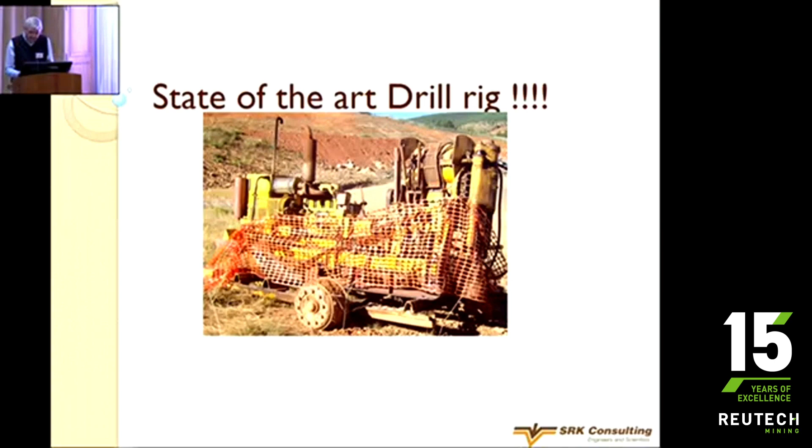Where's my pointer? Where's my pointer, Johan? Is it the button in the middle? Actually, yes, sorry, which one is this? The small one? That one? Yep. Okay, right. Oh, there, I've got it.

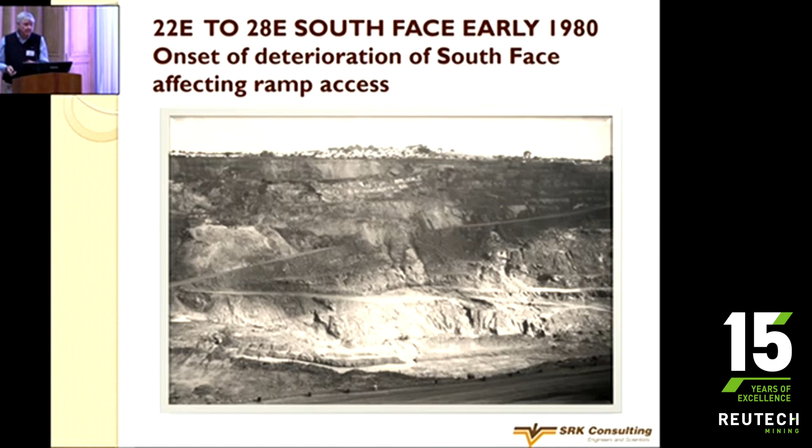You can see the failure starting to develop here - well, not starting, I mean that's developed. This was the main ramp coming down. You can see it deteriorating down here as well. So that was the history of the south wall of Nchanga.

In 2001, just to set the scene, in November 2000, Oscar, Stefan and I were asked to go up to the mine and do a risk review of the open pit. We got up there on the Sunday, and on the Monday morning we had the meeting. The first thing we asked was whether they had an evacuation procedure in place for the mine in case anything happened. Yes, they said they did. We said, can we see it? They sent a young mining engineer off to get it, and we never saw the young mining engineer or the evacuation procedure at all.

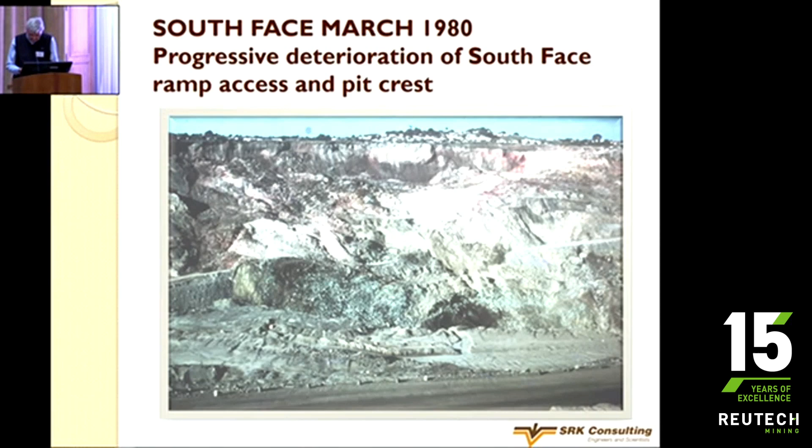In April 2001 - let's go here, sorry - the operation was taking place at the bottom of the pit here, and over here was the crest of the pit at that stage. There was a viewpoint here, and one of the managers had gone down to the viewpoint to keep an eye on what was happening at the bottom. In the corner of the viewpoint, he saw some settlement and a few cracks around the back. It was no big deal because that's what we saw all the time, and we managed it, since there's lots of space in this area. The pit was 265 meters, close to 300 meters deep, and anything that happened here was never going to reach the bottom. Anyway, he reported it to the geotech engineer, who went out to have a look.

Again, he thought no problem here. And then he went out on the Saturday morning to have a look, and there were cracks. The cracks were tens of meters long, with displacement of 300 to 500 millimeters horizontally and vertically. Again, not a problem for us.

We knew it was going to fail, but it was never going to reach the bottom, and it was an issue because there were people working down there. That's where the main mining was taking place.

Anyway, he went out on Sunday morning, and the cracks were hundreds of meters long. You can see from there to there is 400 meters. That's how big the cracking was, and it was bad cracking.

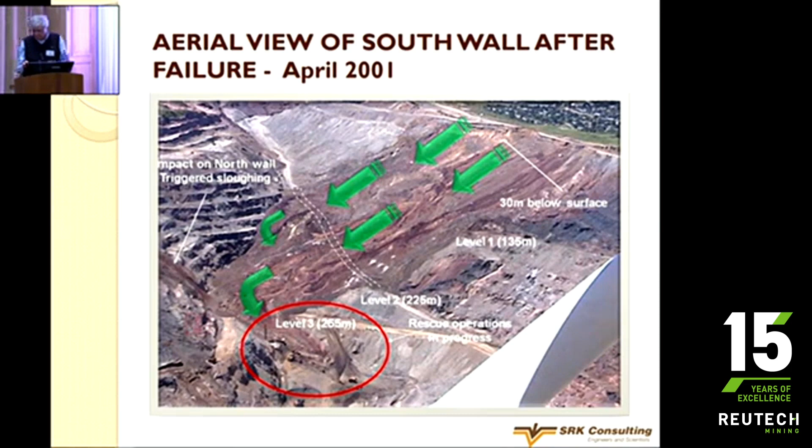I'm not saying that this slope had stood for many years like that. We had small failures on it all the time, nothing quite as severe as this. Anyway, that was the one - there's a P&H shovel sitting there for you, totally destroyed. The claim for this accident, in 2001, was $85 million.

It took 7 years to finalize the claim. The problem was, in the policy drawn up in 1953, around when the mining started here, there were two words used to describe a failure: collapse and failure. The insurance people said whatever word was in the policy - I think it was collapse, not failure - they said collapse is not a failure. And that took 7 years to sort out the difference between collapse and failure.

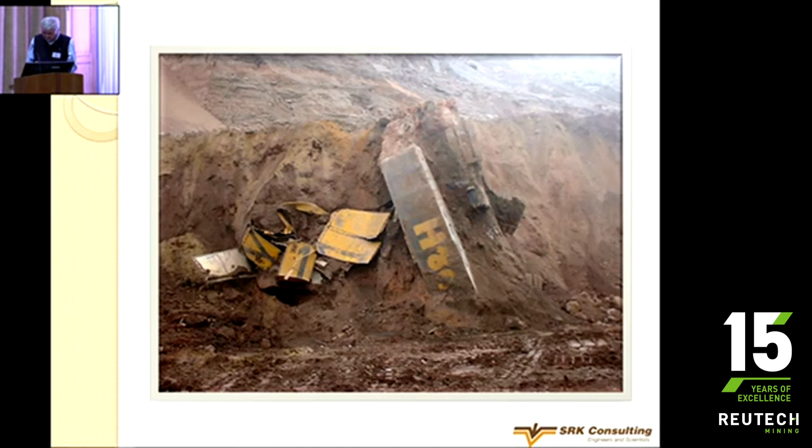Anyway, they were paid out eventually, but it was not a very pleasant thing. Oscar and Bruce Murphy were flying to London almost monthly, certainly for the first 2 years, to meet with the insurers. Again, not very pleasant - you know what lawyers are like, they're not great guys. They're nice guys, but they'll tell you black is white and make you believe it.

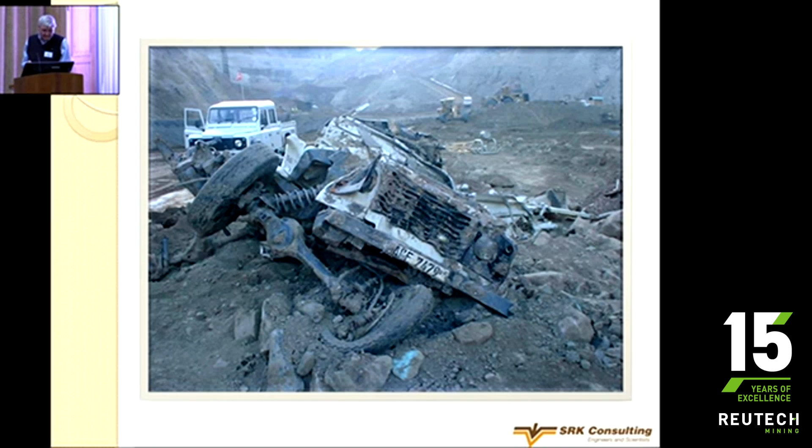A Land Rover, there were people in there. Okay, and that was it. It then took us 6 weeks to get what was left of the last guy out, just as a matter of interest.

Oscar and I had only gone for the week to make sure operations were in place. When we went to say goodbye to the GM, he said, 'Are you both going?' I said, 'Yeah, we both have to go back.' He said, 'No, one of you has to stay.' And when it was me and Oscar, I knew who would be staying - it was Jimmy. I came home 6 weeks later. So I had a very traumatic experience.

We managed to rehab the pit. All that stuff was cleared away. We managed to reestablish the benches, and the mine continued. This is where they were mining originally, and they went back in and completed the cut without further incident.

That was the very sad Nchanga story, and I just thought it was worth sharing it with you, because that's the consequence of mismanaging a slope. The water was a big issue. Every visit we had to the mine, we said, you've got to do something about the water. Nothing ever happened - no piezometers, no nothing.

The pipeline that came from the outlet I showed you, back to the mill on the south face, used to leak like a sieve. When they were pumping, the water just behind where that viewpoint was would shoot 20, 30 meters in the air and then just flood that Dambo area. So there was surface water there all the time.

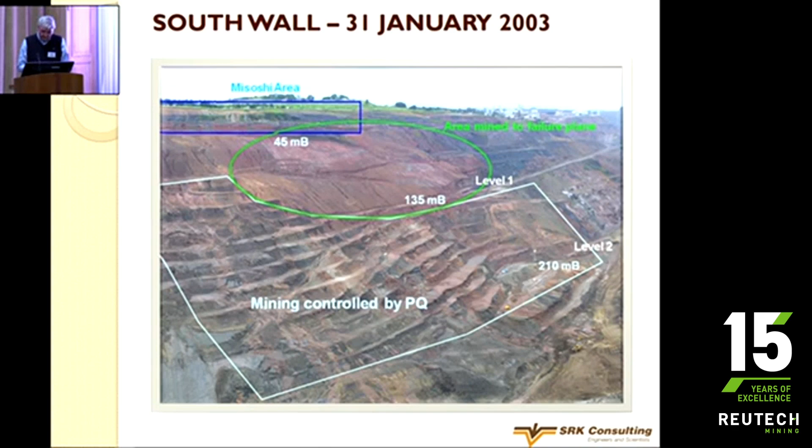Sorry, I'll come back to Cowal shortly.

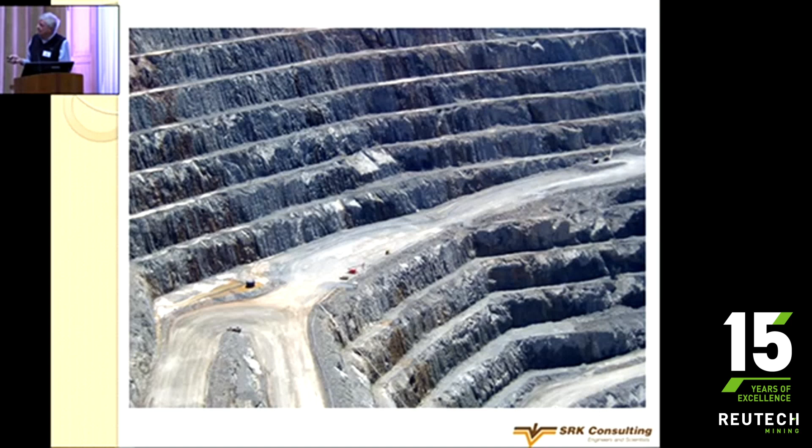Sorry, let me go back there. Oh, this is Cowal as well. The only problems they had were some structural failures. You can see a wedge there, a plane failure, a bit of a wedge, another wedge, and that was all. The crests were a problem to keep in place, but it was no big deal. There was nothing more ever than a bench scale failure. There's some more plane failures, no problem with those.

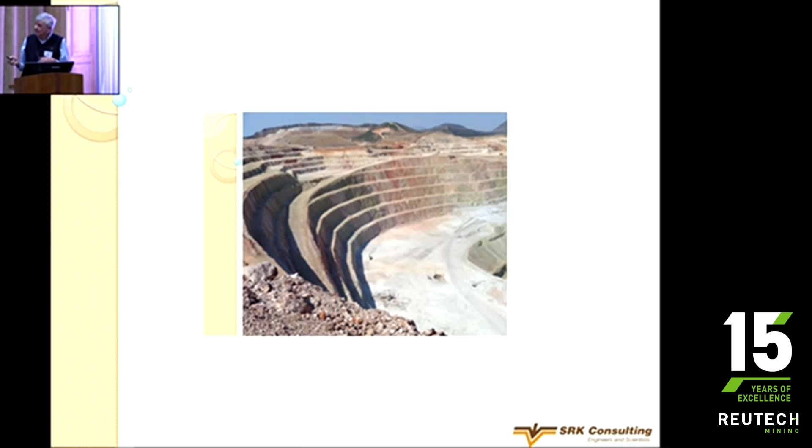This is Kalgold near Mafeking. This is a very steep slope, close to 70 degrees with a very steep foliation. We targeted the foliation on the benches, and we drilled our bench angles off at 70, and we got down to about here with no problem, and then we started to get some failures here.

So we actually started putting anchors in, 20-meter anchors, 10-meter benches. They were 10 meters spaced 10 meters horizontally, and every bench between those two 10s, we put in one in the middle between those two, and we anchored that thing from that sort of mid slope height to the bottom. They're now pumping tailings into the pit from another mine that sits to the north, just on the other side of the main road, and that's being filled up with tailings now.

This is... there's the one in America. No, not Bingham. Is it Gold Strike? Anglo? Mike, do you remember the name of it?

Okay, not serious. This is the infrastructure for an underground mine in the area, and there was a portal underneath here as well. It was a pretty well monitored failure. It was caused by a big structure on this side and another structure on this side. So they knew all about it happening, and everybody was moved out, certainly from the underground mining which was happening below this slope at that time. But to re-establish what was happening at the bottom, and then to come and try and take this out, that became problematic. But they did manage to do it, and I think it still operates today.

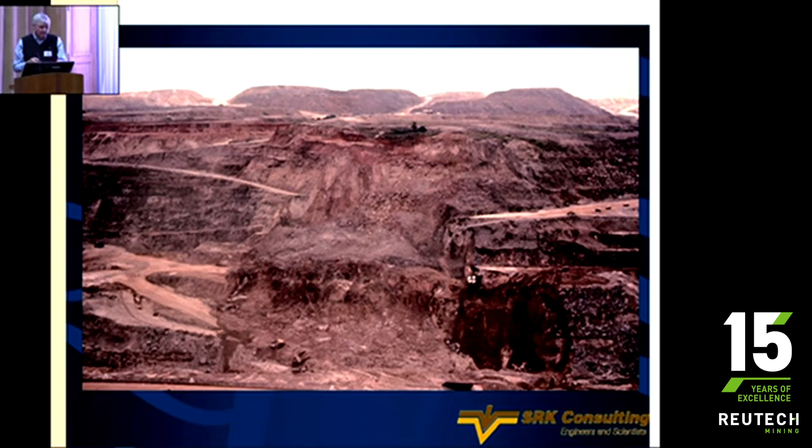Right, that worked. This was Anglo's mine at Sadiola in Mali.

And the problem that we had here was the weathering profile in the saprolite - there was also quite a thick cover of saprolite. Again, it was 32 to 35 degree slope angles. But because the drilling was fairly sparse on that slope, the mine decided to steepen the slope before they got to where the rock mass actually became fairly decent. And you can see it's quite hard rock here.

But above it, the saprolites are bad. And these slopes started to fail, and the main ramp into the pit came down that wall. And of course, it wiped out that ramp, and they had to put another ramp in on this side of the wall, this side of the pit.

And then we lived with the problem of these boulders, because the failure was now undercutting the slope, and this stuff was raveling in. And this is where there was a shear zone, about 40 meters wide, dipping to the west. This was happening above the ore, so it made mining the ore out here very difficult. Anyway, they managed to do it, and they've moved on from there now.

I'm just coming back to Cowal Mine, that lake I told you about, and what they didn't do about trying to cut the water off. This is what happened.

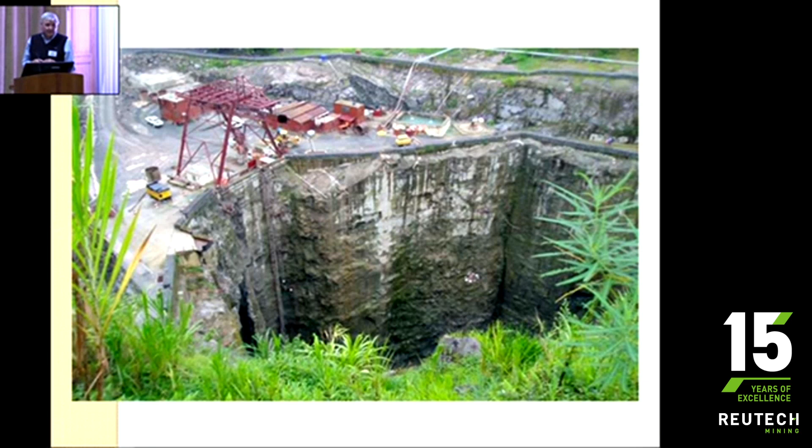This is one of our famous SRK vertical pits. This one is in Sierra Leone at Koidu, a town called Koidu, diamond mine. There was a small quarry here. These are some of the benches of the quarry, but the owners now needed revenue to start their open pit mining. They approached us and asked how they could get the kimberlite out without stripping any waste.

We had done a vertical pit before. The first one we did was at Nyala, a chrome mine in Zimbabwe, which was very successful. We got to about 90 meters, and the bottom of the chrome market fell out, and they just walked away from it. That thing stood there for about another 2 or 3 years with a bit of deterioration. It was being supported, but the hole remained open.

This one we mined down on the contact. So this was the granodiorite contact with the kimberlite, and we came down right on that contact as closely as we could. Support went in all the way down, long anchors at the top, getting shorter and shorter. The walls were shotcreted, because this was going to go to 110 meters.

Again, we got to about 95 meters, and there was a big failure, which I'll show you next. But the walls had to be shotcreted and meshed and shotcreted again, because you can't have anything fist size coming off from up here reporting to the bottom - it's going to do some serious damage if you've got people there, or equipment even. Big issue.

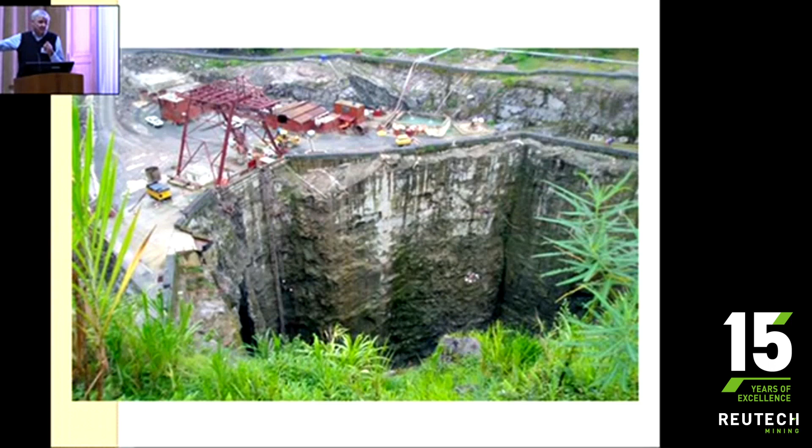I again got a call that night this happened, to get on the plane and come up the next day, which I did. Let me just go back here. They strung a cable, they fixed it. It was in this wall here. They fixed a cable here, swung it and slung it across to this side, and we could get in the kibble. It was one of those air-driven things, so we could go across, sideways and up and down.

In these two planes that you see here, there was no sign of any anchors or any holes even. And when you get a failure like this, which you have supported, you will normally see anchors hanging out. Nothing. In doing the root cause analysis, we think that they put in holes maybe 3 or 4 meters long and stuck a few cables out the collar, and that was it.

Here's a scale for you. Here's a guy standing here, say he's 2 meters. And this was at 95 meters deep now.

This happened, came out with a blast. There's a big blast at the bottom here. Thank heavens there was nobody in the pit, obviously everybody was evacuated. But this was pretty much the end of the vertical pit. They thought they could backfill it and put more support in, but that was going to be too expensive, so they never did that. Anyway, off they went with that.

So if anyone wants a vertical pit, we can help you.

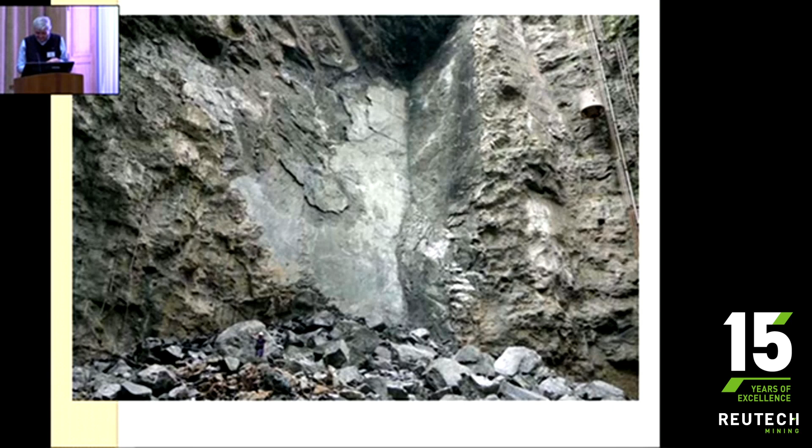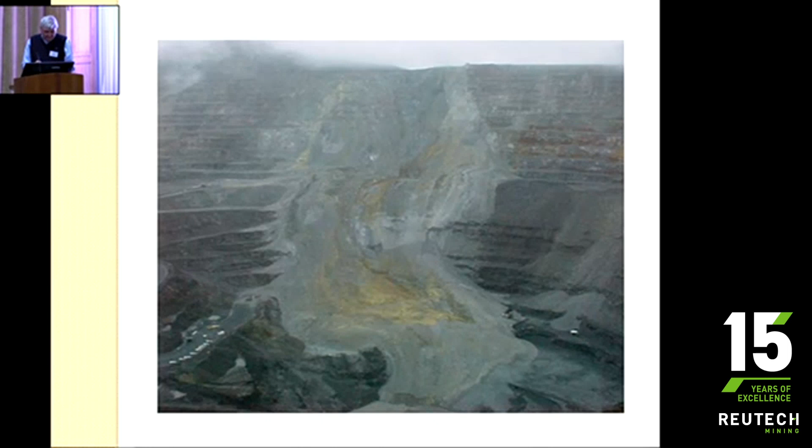This is a pit in Chile, the name slips me again. But this was quite an interesting one because we had been doing some work there, and this was the main ramp into the pit that went right down to the bottom and turned around and came down in the bottom. We'd been worried about this failure happening.

It was a high risk area, and we'd been talking about force majeure to them. Force majeure, those two words were not something that they understood. We said, if something happens to you now, this will close the mine. And in fact, it did. It closed the mine, and that was that.

It reminds me of a job that Oscar and I did in Indonesia, a mine called Batu Hijau. There was an American guy doing the design there, and his philosophy was he would mine a bench - they were 15-meter benches - and if the bench looked okay, he'd pace off 5 meters and then start again.

And that's how that was his design, literally. He only did something when some cracks appeared, then he'd step off 10 meters instead of 5 meters. So we said, you really can't continue like this.

It was a circular pit, and we'd identified on the east side of the pit that there were some structures there that were unfavorable. But this guy said there's no problem, nothing worried him. And in a paper that we wrote and presented in San Francisco, we used that as one of our case histories, and we predicted a failure in that area.

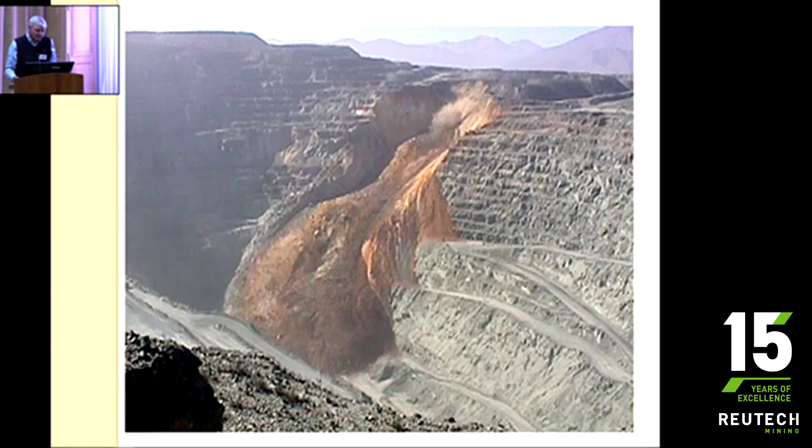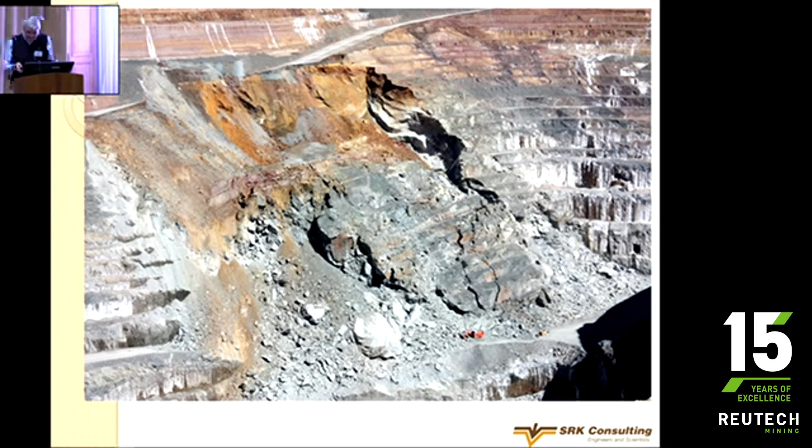This is Sunrise Dam, and this is where our good geotechnical friends thought they could steepen up the slope at the bottom to get some ore out that they wanted, and this happened. It damaged the ramp up here, as you can see, and it even went higher than that, as you can see here.

It went all the way to the crest of the pit, taking out that ramp totally, plus some ramps coming from the top as well. I can't remember if this was the end of it - I think they continued to mine here and got out more ore, but it was a problem.

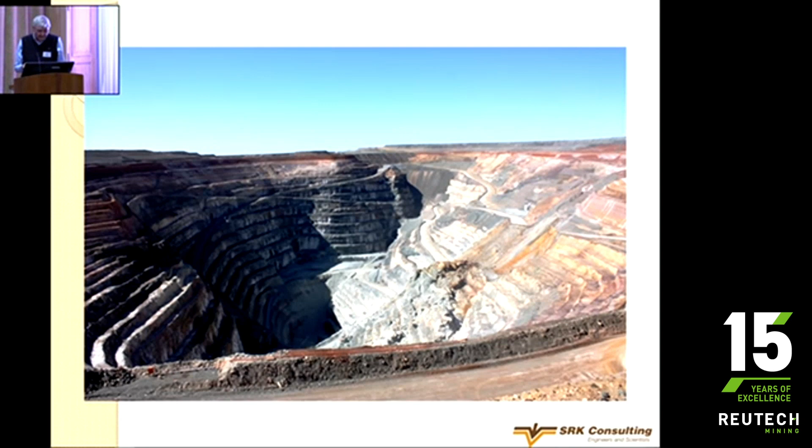But interesting. And in fact, this brings me on to the new tailings dam document that's come out and what we have to do with tailings dams and the engineer of record. I think that in terms of designing pit slopes, we need an engineer of record to sign off on these things. Too many - I mean, look at all these failures I've shown you now.